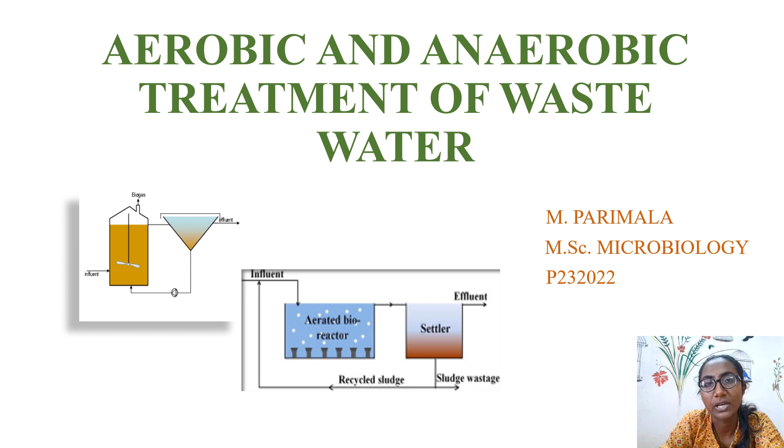Introduction. Water which is contaminated by human use and no longer suitable for its normal purpose is known as wastewater, and this wastewater is released from different areas. Wastewater is broadly classified into several categories based on its source, composition and treatment. They are domestic wastewater, industrial wastewater, municipal wastewater, stormwater, grey water and black water.

Wastewater contains pollutants: organic matter like food scraps, human waste and other biodegradable materials, pathogens like bacteria, nutrients like phosphorus and nitrogen, suspended solids like sand and dust, and chemicals like detergents, fertilizers and pesticides.

Biological wastewater treatment harnesses the action of bacteria and other microorganisms to clean water, and this treatment is used worldwide because it is effective and more economical than many other chemical and mechanical processes.

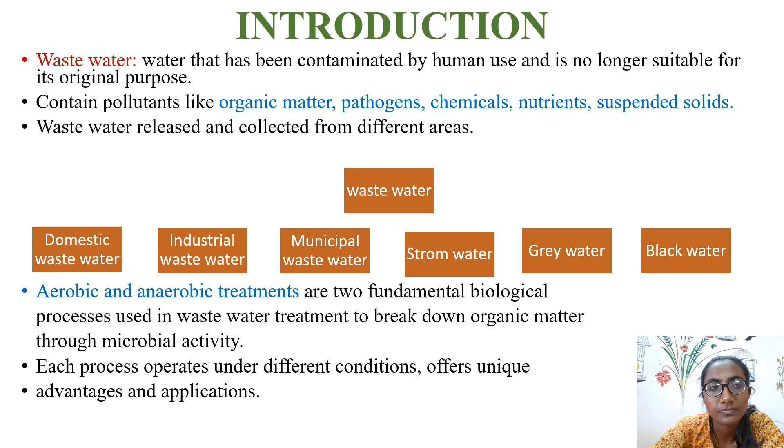The importance of this secondary or biological treatment of wastewater: the first one is public health protection. Proper treatment of wastewater removes or reduces the pathogens which cause diseases like cholera, typhoid, etc. This protects communities from waterborne illnesses. Next one is environmental protection.

Wastewater contains substances like organic matter, nutrients and chemical toxins. When these substances are discharged into rivers, lakes or oceans, they create environmental pollution and lead to eutrophication, where excess nutrients cause algal growth, by which the oxygen level of the water decreases and kills aquatic life.

Next one is conservation of water resources. Wastewater treatment allows safe reuse of treated water for purposes like agriculture, irrigation and industrial processes, which helps in conserving freshwater resources, especially in water scarce regions.

Next one is nutrient recovery. Treated wastewater can be a source of nutrients like phosphorus and nitrogen, which can be recovered and reused as fertilizers, reducing the need for synthetic fertilizers and promoting sustainable agriculture practices.

Next one is prevention of groundwater contamination. In areas which depend on groundwater for drinking and agriculture, untreated wastewater contaminates the water supply and causes problems for the people. Next one is enhancement of urban and industrial development.

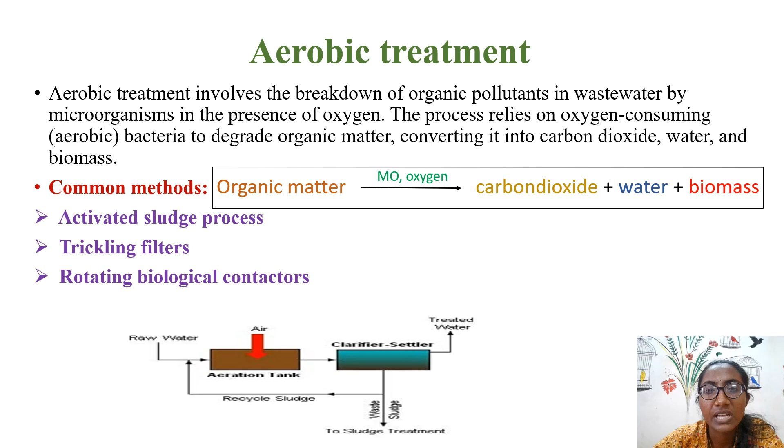Activated sludge process. These methods include primary, secondary and tertiary treatment. Aerobic treatment comes under secondary treatment, which takes place in the aeration tank. This is the aeration tank where the microbial activity takes place.

Primary clarifier wastewater, which is collected from the primary treatment, is pumped into the aeration tank, which is a critical component of the activated sludge process. Its primary function is to provide a controlled environment for the growth and activity of aerobic bacteria. These bacteria consume organic matter in the wastewater, breaking it down into simpler and less harmful compounds.

Air is introduced into this aeration tank through a diffuser located below the tank, or other devices. This creates a well oxygenated environment which promotes the growth of aerobic bacteria.

These bacteria are naturally present in wastewater or can be added as seed sludge for the better activity of the microbes in the wastewater treatment. Bacteria consume organic matter in the wastewater, converting it into carbon dioxide, water, and new bacterial cells are formed. As the bacteria consume organic matter, they also multiply and form a thick sludge-like mass, which is known as activated sludge,

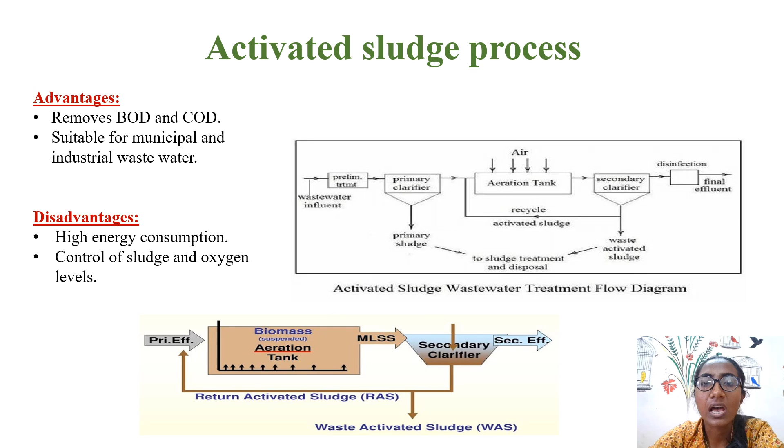Trickling filter method. In this method, trickling filters are used, which are present in the aeration tank through which wastewater passes. As wastewater flows through this filter media, the microorganisms attach themselves to the surface of the media and form a biofilm. The microorganisms in the biofilm absorb oxygen from the air vents which are present in the aeration tank, through which oxygen is supplied into the tank.

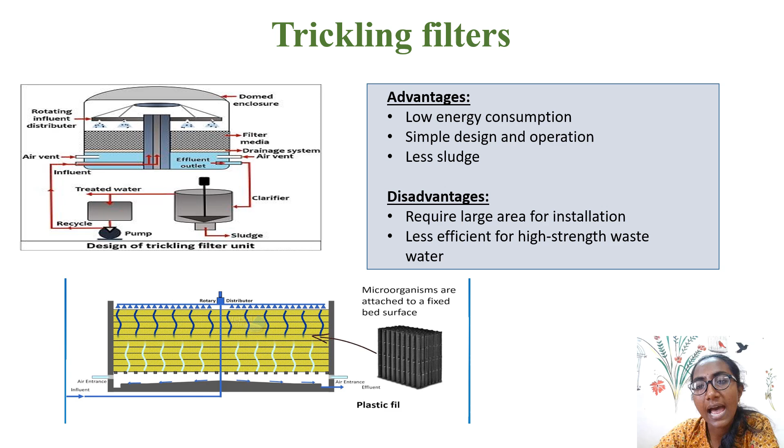The microorganisms consume nutrients and form a sludge which is collected from these filters. The treated water is then discharged from this filter unit to the effluent tank for the effluent treatment. The advantages of this method include low energy consumption, simple design, and less operative system. Less sludge is produced in this method. The disadvantages of this method include the large area required for the installation or the setup of these tanks and the other parts of this method. Less efficient for high strength wastewater.

Rotating biological contactors. These are the rotating biological contactors, RBCs, which are present in the aeration tank of this method. The front view of these RBCs is like a disc shape with media support stands in between. 35 to 40% of this disc will be submerged in the tank with wastewater. This is the side view where the discs are arranged in multiple setup in the aeration tank.

The surface of the RBCs is covered with a biofilm, which is a layer of microorganisms. As the RBC rotates with the help of the motor which is attached to this system, the wastewater is continuously exposed to this biological film. The microorganisms in the biofilm utilize oxygen from the tank to break down the organic matter in the wastewater. As the microorganisms break down organic matter and these pollutants, the pollutant content in the tank is reduced.

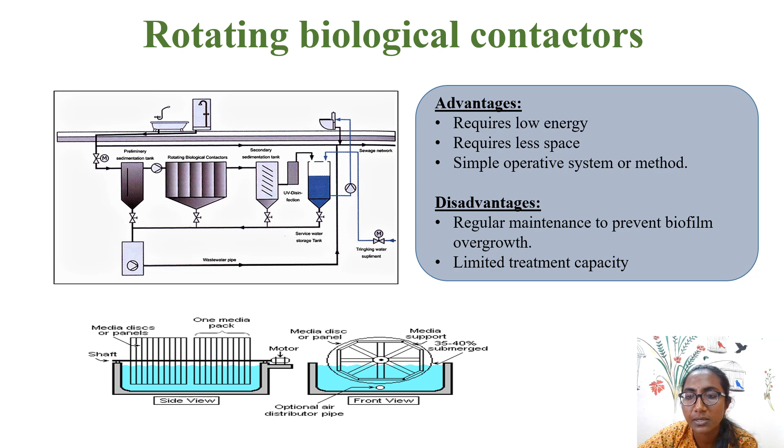The advantages of this method are low energy and less space required, and a simple operating system and method. The disadvantages of this method include regular maintenance of this system to prevent the biofilm overgrowth and limited treatment capacity, where a smaller amount of wastewater is treated in a single treatment.

Anaerobic treatment. This is another method of treating wastewater. Anaerobic treatment involves degradation of organic pollutants in the absence of oxygen. This process uses anaerobic microorganisms, anaerobes, to break down complex organic compounds into simpler substances like methane, carbon dioxide, and biomass. In the process of treatment, the wastewater after primary treatment is placed in closed containers where anaerobic bacteria degrade

organic matter through a multiple stage process involving hydrolysis, acetogenesis and methanogenesis. The methane produced from this treatment is used as a renewable energy source. The common methods of anaerobic treatment are anaerobic digestion, upflow anaerobic sludge blanket, and expanded granular sludge bed.

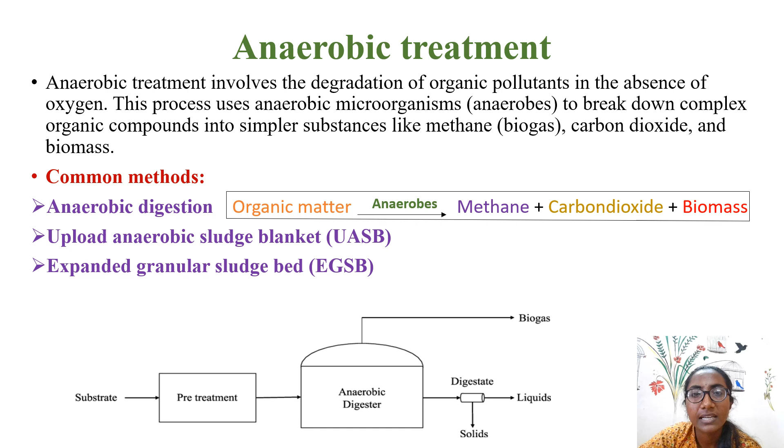Anaerobic digestion. In this method, organic waste is placed in a sealed container called an anaerobic digester. These are the anaerobic digesters where the biological treatment takes place. In this environment, bacteria and other microorganisms break down the organic matter in the absence of oxygen.

As the organic matter is broken down, a biogas mixture is produced. This biogas typically consists of methane and carbon dioxide along with some other gases. The biogas can be further processed through a compressor and used as a renewable energy source.

The anaerobic digestion process also produces a liquid effluent known as digestate, which is further processed for effluent treatment. This wastewater contains nutrients and a small amount of organic matter that need to be treated before it is discharged into the water bodies through tertiary treatment.

The advantages of this method are renewable energy production, as biogas is produced in this process, and waste reduction: it reduces the volume of organic waste present in wastewater, and it reduces organic waste going to landfill. Reduced greenhouse gas emission: this process can help reduce greenhouse gas emissions by capturing methane, a potent greenhouse gas, preventing its release into the atmosphere.

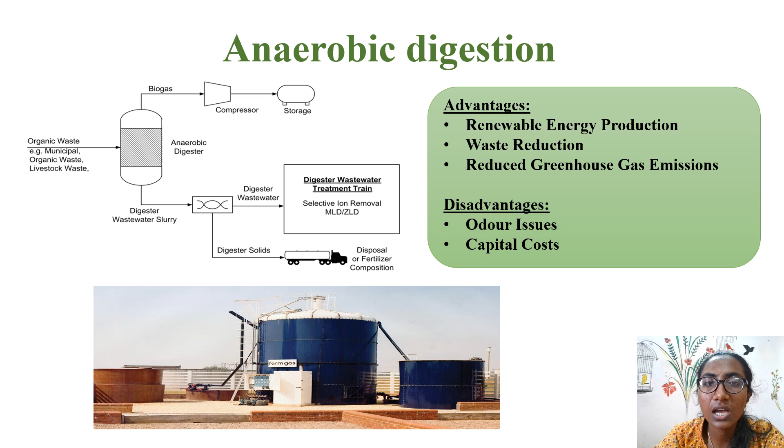Odor issues: if not properly managed, this process produces an unpleasant odor which is a risk for people. And capital cost: the investment in an anaerobic digestion facility can be high.

Sludge blanket: this layer of sludge particles forms above the sludge bed and provides a favorable environment for the anaerobic microorganisms to thrive and carry out the digestion process. As the wastewater flows upwards through the reactor, it comes in contact with the sludge bed and the sludge blanket. The organic matter in the wastewater is then degraded by the anaerobic microorganisms within these layers, producing biogas as a byproduct.

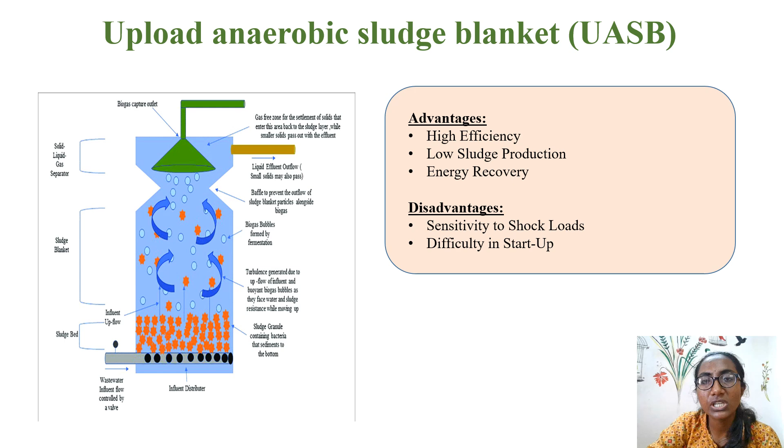The advantages of this method are high efficiency, low sludge production, and energy recovery. The disadvantages are sensitivity to shock loads and difficulty in startup.

Expanded granular sludge bed, EGSB. In this method, EGSB reactors are used. The anaerobic process primarily takes place within the expanded granular sludge bed reactor. This layer is composed of densely packed granular sludge, which is a biofilm containing a diverse community of microorganisms. These microorganisms are capable of breaking down organic matter in the absence of oxygen.

As water flows upwards through this layer, the organic matter comes into contact with these microorganisms, which utilize the organic matter as a food source and produce biogas as a byproduct. The unique structure of these EGSB reactors, with an expanding bed of granular sludge, provides an ideal environment for the anaerobic microorganisms to thrive and carry out the digestion process efficiently.

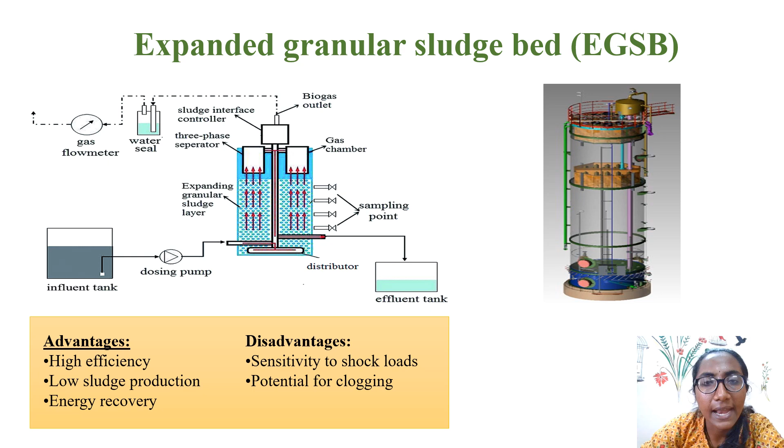The advantages of this method are high efficiency, low sludge production and energy recovery. The disadvantages include sensitivity to shock loads and potential for clogging.

Comparing aerobic and anaerobic treatment, oxygen is required for aerobic treatment and no oxygen for anaerobic treatment. Aerobic bacteria are involved in aerobic treatment. Anaerobic bacteria are involved in anaerobic treatment. The byproducts of aerobic treatment are carbon dioxide and more sludge. The byproducts of anaerobic treatment are methane and less sludge. Energy use and sludge production are higher in aerobic treatment than in anaerobic treatment.

The speed of treatment is faster in aerobic treatment than anaerobic treatment. Aerobic treatment is applicable for low strength wastewater like municipal wastewater. Anaerobic treatment is applicable for high strength wastewater like industrial wastewater. The cost is high in aerobic treatment due to the energy requirement for aeration. The cost is low in anaerobic treatment due to the recovery of energy as biogas.